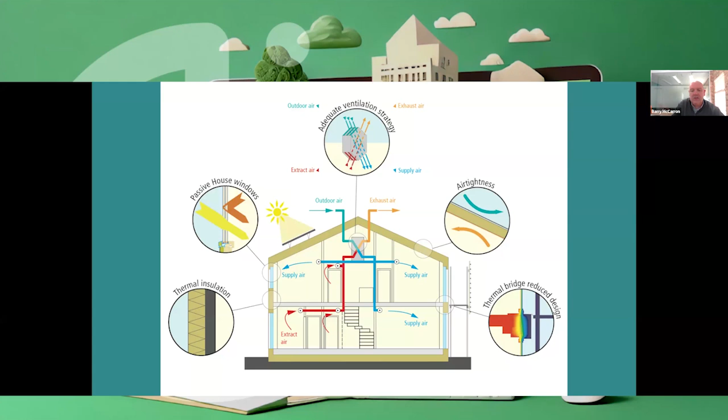Passive house for retrofit is no different than passive house for new build. As Jamie outlined, there are 5 key principles, all basically relating to floors, walls, and roof. First is having really good U values with high quality insulation, which drives down heating demand. Alongside that, it's critical to get the thermal bridging right. Then we look at windows, triple glazed, and air tightness, which goes hand in hand with the fifth principle: mechanical heat recovery ventilation. All 5 are well-proven methodology for getting genuine high performance.

When you couple them with renewable energy, you get excellent low carbon heating solutions. We've had a pipeline since we started offering retrofit, and the first project I'll profile today is a standard semi-detached house going back to the 1940s, in Glasnevin, Dublin. That's the first case study. We also have this one in development in Howth, also in Dublin.

I made a joke yesterday—I'm not sure what the lambda value or insulation level is on that ivy, but it's going to be an interesting project, with a brick finish underneath it. We're looking forward to the challenges that one will present. And then we've this gorgeous grand design, you could say, up in Donegal, which will be an exciting project for us in KORE Retrofit as well.

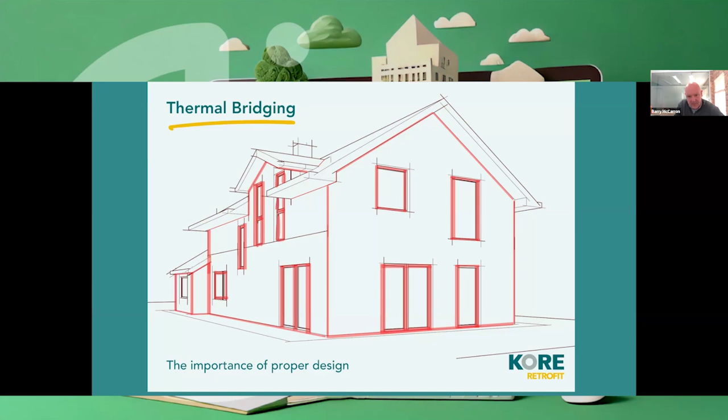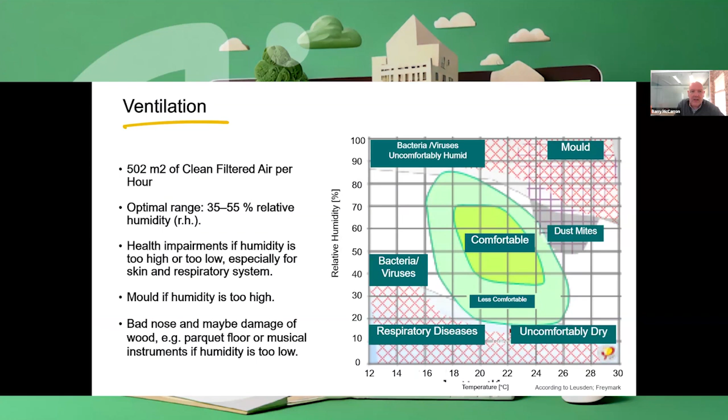All 3 of these are to the passive house retrofit standard. The big challenge I usually identify is that two of the principles hardest for people to adopt are thermal bridging, well depicted in this graphic showing all the red areas as thermal bridging, and not everybody is au fait with this—it hammers home the importance of good design. The other area that goes hand in hand with this is ventilation, which we'll take a deep dive into.

The Glasnevin project, as I said, is from the 1940s. It's currently sitting at a BER of 405 kilowatt hours, and we're proposing to get this to an A1, meeting the passive house standard in combination—going from a whopping 405 to 20 kilowatt hours. The treated floor area is roughly 201 meters squared, and the form factor of the building is not too bad. A bungalow would be quite bad, up at 3 or 4, and some of the other presenters will touch on that.

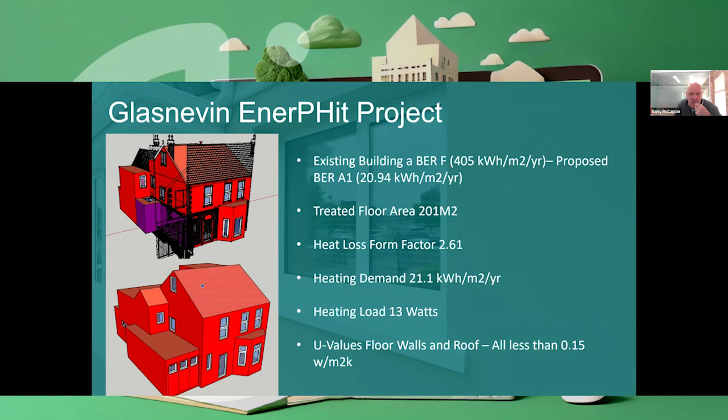The heating demand via the initial PHPP and designPH is 21.1, which comes under the passive house level of 25 kilowatt hours, and the heating load comes in at 13 watts per square meter—really good high performance. The U values on the project are all under 0.15. I'm caught for time so can't go into every wall type, but there's a variety of different arrangements in this project, which illustrates how passive house isn't that rigid—it does allow a certain degree of flexibility.

Building on the earlier slide about thermal bridging, I always like to quantify that and give a reference point. The thermal bridging in this house, illustrated there in the stick frame pulling out exactly what's there, totals 405 meters added up for this building in Glasnevin, and it's just a semi-detached house. A useful but comical reference point is that's higher than the Empire State Building—that really hammers home how significant the meterage is when it's all added up.

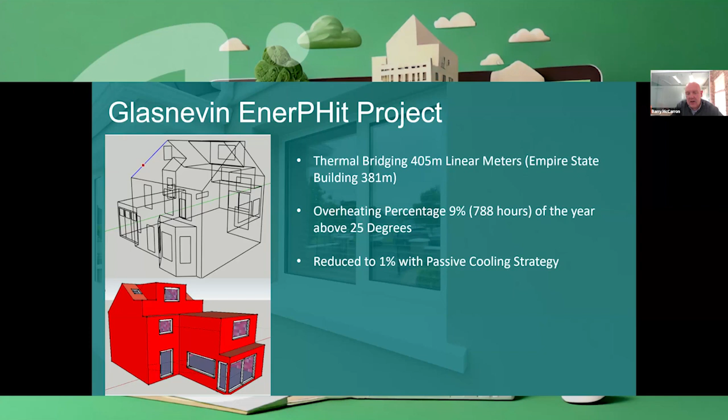The overheating, when initially modelled—because with retrofit projects you're usually constrained, you can't really use PHPP as a design tool since the building is in situ—came in at an overheating of 9%, without introducing any mechanical ventilation. With careful design and implementation of a passive cooling strategy, we were able to get that down to 1%.

So I'd expect a question on that afterwards. In terms of the running cost, this means down to 21 kilowatt hours, which is outlined there, that's going to extrapolate to about €500 a year, and the domestic hot water again coming in at an expected 585.

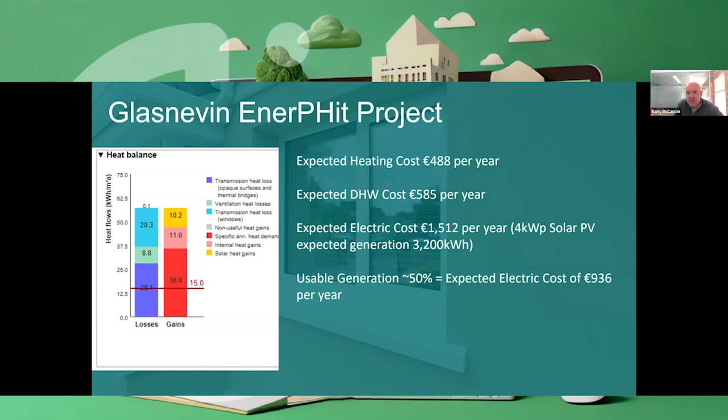So all in all, when you combine that with electric cost, based on a standard situation, and the PV being in play, you're talking an overall total energy cost of €2,500 a year. When you compare that to what the house was running at and being lived in, that works out at a saving altogether of circa €6,100 a year.

Again, what is taught in a lot of the passive house teaching is to do a full appraisal of that and extrapolate it over a mortgage. These homeowners have a 30-year mortgage, so you're talking a combined saving over that period amounting to a whopping 183,000 if it was the full thing, but 51,000 on the other hand is the running cost. So that's a good picture of the before and after.

And then by using retrofit as a stretch metric within this company and on as many retrofits as we can, we're really addressing this operational story. So not only in terms of energy and costs, but also for future metrics, carbon is a really good story as well with all of this. And of course, we're moving from NZEB, thankfully, into ZEB, so this goes hand in hand with the trajectory of the building industry in Ireland.

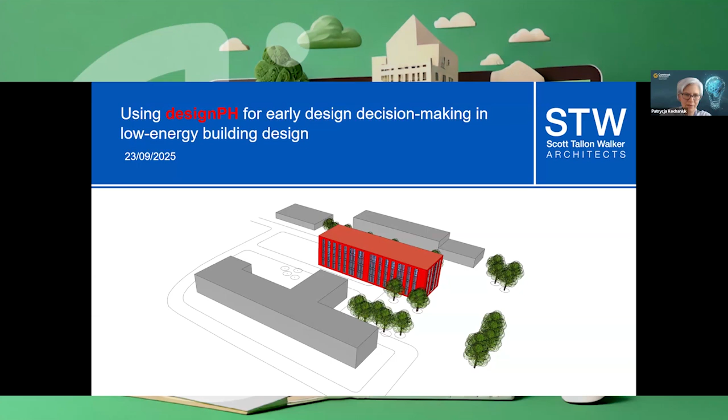So what is designPH? It's a plugin for SketchUp, so it lives within SketchUp software. It works as an extension. So we're using SketchUp for developing the model, and then through designPH's tools we apply the U values and so on, the thermal properties of the building. And it calculates the heating demand.

So it's all about the building physics within the design for low energy buildings or passive house buildings. So it's the first part of the design. From designPH, it needs to be exported to PHPP in order to apply the services and the heating systems to get the actual energy use. But this is the first step, and for the preliminary design, this is what we should be focusing on.

So the process starts with just importing the site to SketchUp. We can do it through geolocation, so we can import the Google map with the terrain and with the objects. For some areas, I think Dublin is pretty much developed, it can be just simply put in.

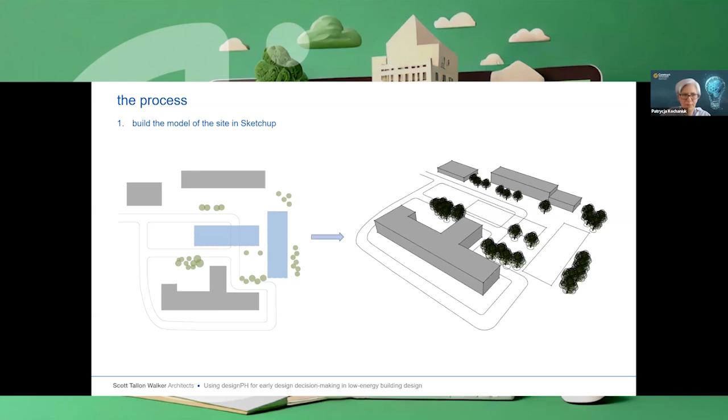Then we look at the building. For the model, we only model the external skin of the external envelope, so it's a single skin. We apply its properties through a right click of the mouse, and we pick the U value from the list. So it's very simple.

For the walls and floors, we apply the U values and thermal bridges. For the windows, it uses the components in SketchUp, so we can just apply the thicknesses of the frames and then the U values and G values of the glazing. It's quite detailed in what SketchUp can do. There's quite a lot of information in there, and it's quite reliable.

Apart from what we put into designPH, when we look at what I'm going to be looking at later, we also need to consider overheating, and for that we need to do the export to PHPP and apply the ventilation settings so we can see what the problem is with the overheating.

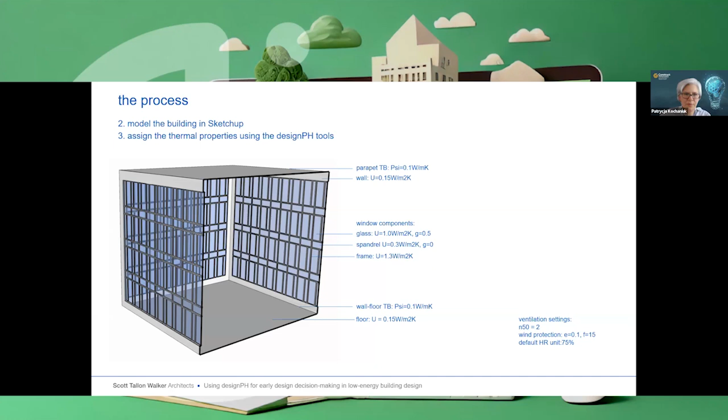So we locate the building within the site. In this case, it's a 4-story office building with a floor area of 2,800 square meters. The shape was already thought over, and we just put in the most efficient form factor possible.

This is how it looks after pressing the button to run the analysis, and we can see the same red buildings that Barry was showing. This is how it looks after it's analyzed, with the same graph on the left showing the balance of energy, the losses and the gains.

In the case of an office building with a lot of glazing, you can see the majority of losses are through the windows. I should have said, I've used double glazing for this building, so the aim would be to achieve the low energy building level. It's not a passive house level, but we can see how big of an impact the windows have.

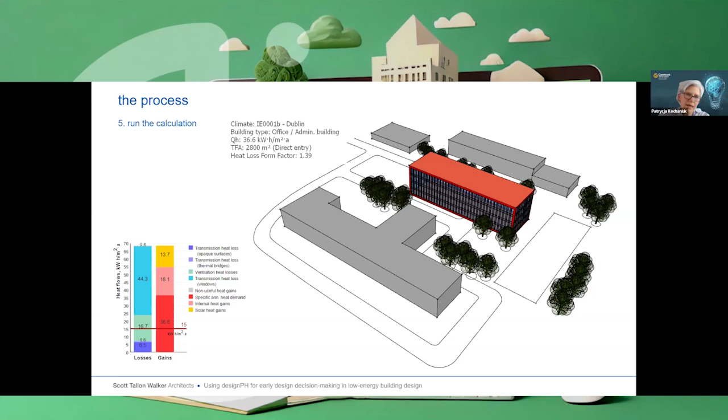Also worth mentioning is the internal heat gains, which is also very high in commercial buildings, and that's part of why overheating is an issue.

For this study, we were trying to achieve under 10% overheating targets. That's like the first step during the design, and then it can be optimized further with the design of natural ventilation or mechanical ventilation if need be. But for the building envelope first pass, the aim is to get under 10%.

So we had another pass, and here it's hitting the target with larger overshadowing devices outside. So that's the first option.

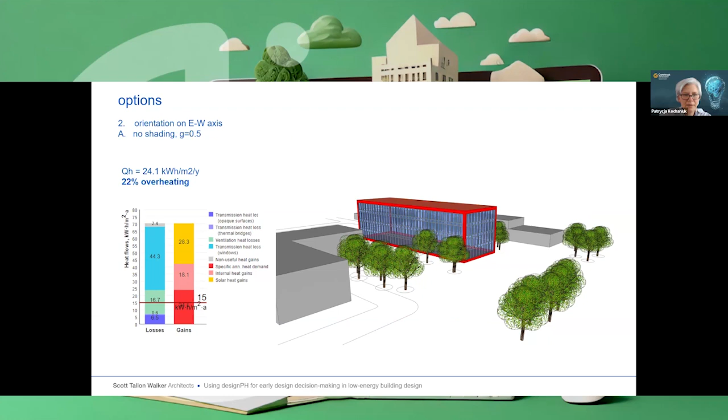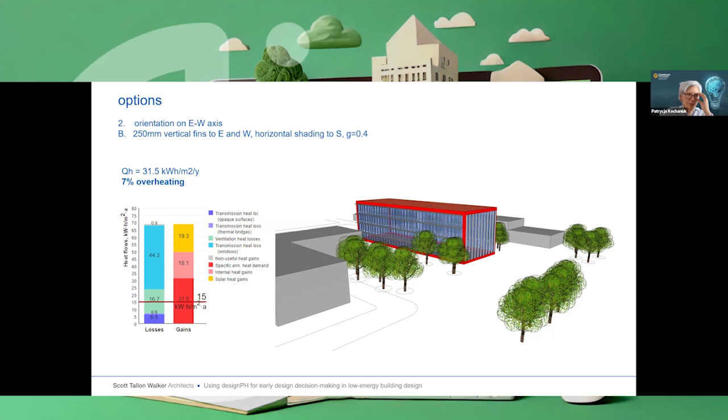The second one is we're looking at the other direction, so we now have long elevations facing south and north. Straight away the heating demand is slightly lower than our first option with the other orientation. With the reduced G value and a little bit of shading, we're achieving what we wanted for the overheating.

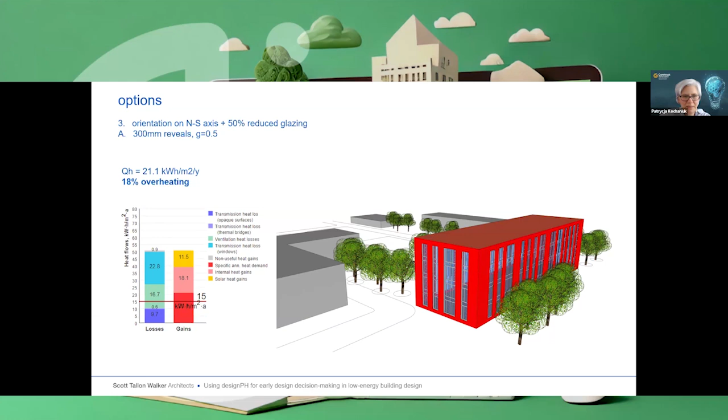So then we looked at another option which reduces the glazing. Going back to this orientation, the glazing is reduced by 50%, and straight away the overheating is lower, even for this baseline level, and then lower again with lower G value, and similar for this one.

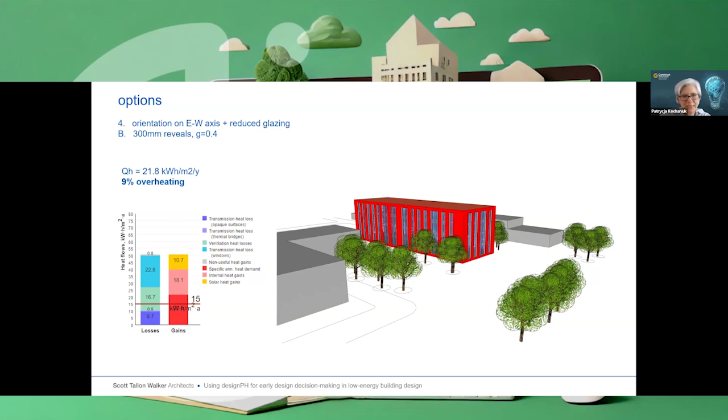Out of all four options, the east-west axis with a low amount of windows is the best option. It's not surprising, but I think it's valuable to see it and understand what impact it has at the very early stage of design, so we can know for sure that this is what it's going to be.

So these are the four options, and if we look at the line from left to right, you can see an 8% improvement for the fully glazed facades between the orientations, and similar for the facade that's 50% less glazing. But for the comparison going up and down, the amount of glazing makes a much bigger difference. Finally, the comparison between the first option and the last option is 36%.

So just by using exactly the same materials, basically the same building, just changing the orientation and the amount of glazing, it's making a lot of difference. So that's from me - this is what we do at a very early design stage.

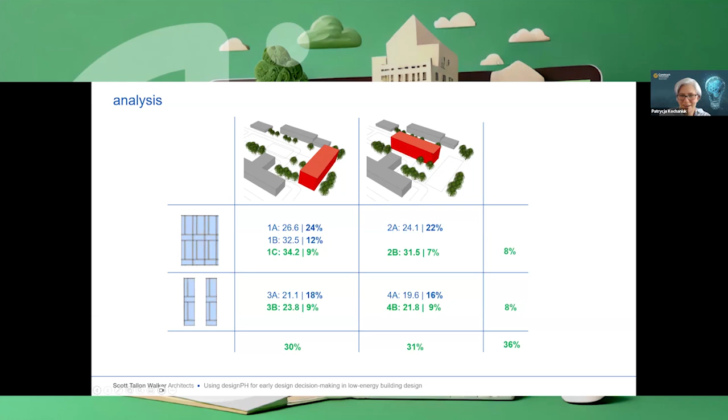Thanks, Jamie. Brilliant. Thanks, Patrycja. That's great to see. You looked at that investment early on in terms of decision making, having some quick models that you can put together and look at the impact of orientation, proportionate glazing, and shading on the overall heating demand and overheating in buildings.

Many people forget overheating is now as big a concern as reducing the amount of heating needed in a building, so trying to get that balance. It has always been a problem, dealt with by mechanical ventilation, but we need to pay more attention to this. So we're trying to have low energy buildings, reduce the amount of mechanical ventilation required, and therefore have less energy demand on our buildings - that's where good concept design comes in to achieve that.

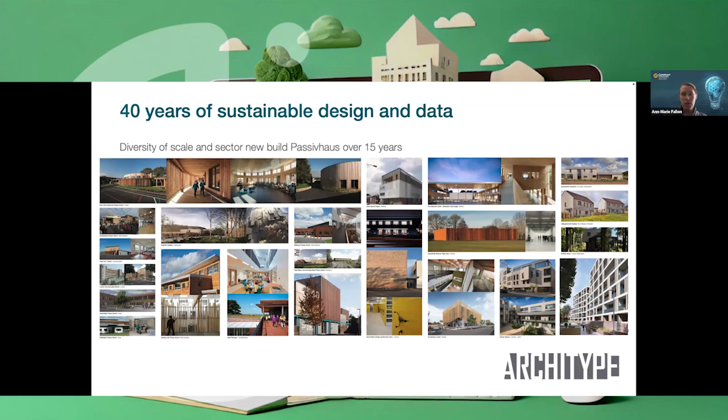So I'm Anne-Marie Fallon, an Associate Director with Architype, and also one of the new co-directors of the Passive House Trust in the UK, phasing into that job over the next couple of months. I'm here to talk about Architype's development of schools generally over the last couple of years across the UK, and in particular Scotland, with one more detailed case study to go through.

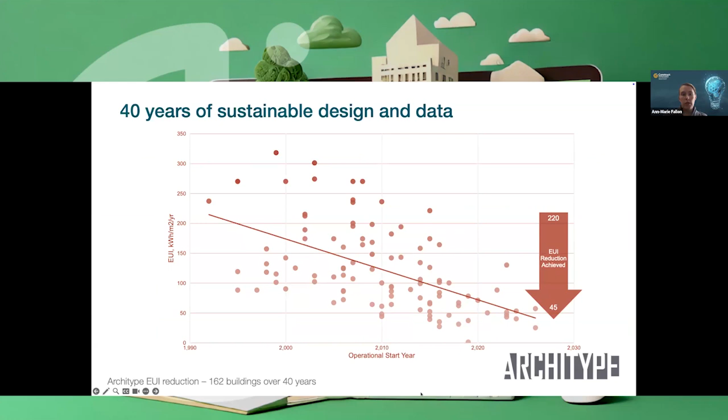Last year, Architype celebrated their 40th anniversary. They have their practice with 3 studios established across the UK. You can see that from the early 1990s, we've been gradually improving our energy use intensity outcomes for our projects - this is looking at the actual operational use of these buildings currently, and we're on a downwards trajectory. I'd really encourage people to look at their own practice and approach in the same way.

I'm just going to show a few slides of completed projects and some more recent projects. We mainly focus on passive house projects as a methodology in the practice because of the quality assurance that comes with it - partially for the climate emergency, but also because clients, especially post-Grenfell, are really looking to amplify quality assurance in their procurement processes.

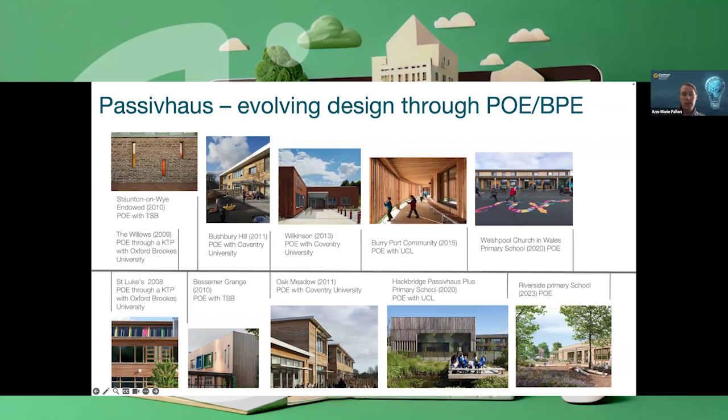So we've done a lot of post-occupancy evaluation on our own projects. There's a list of our primary schools where we've learned early lessons, like the overglazing and localized overheating that tends to happen in projects, learning those lessons and bringing them forward over the last decade or so. And we're able to evidence that some of the standards out there, like the net zero carbon building standard that various industry members have set in the UK - the Enterprise Centre at the University of East Anglia has been performing at the level targeted for 2050, 35 years ahead of that target. Ever since it was completed in 2015, it's achieving that energy use intensity that's been set.

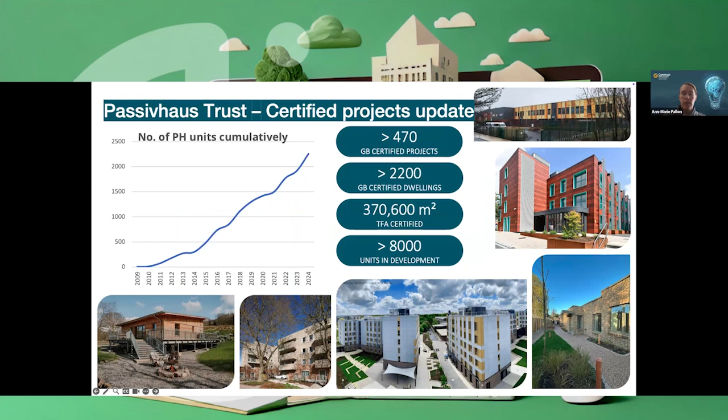Just with my Passive House Trust hat on, a bit of an overview at the end of 2024 of where Passive House certification was in the UK in relation to units, number of metres squared of area, etc. There's an ever increasing amount of buildings being delivered at scale.

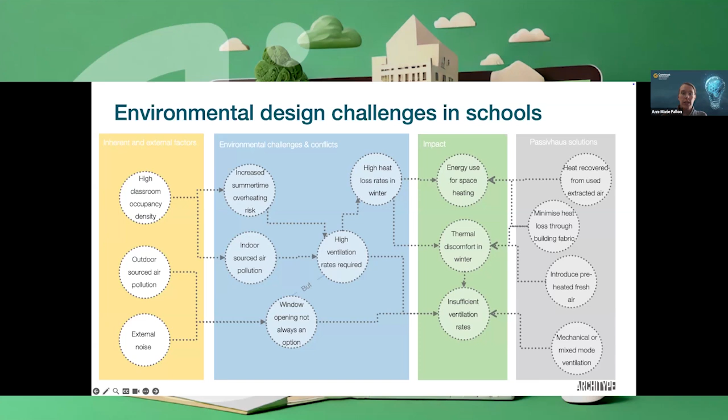Back to schools and the specialism I'm talking to you about today. We know there's a lot of environmental design challenges in schools, and I understand there's actually no Passive House schools in Ireland - would love to know more about that if anybody has information. We're dealing with a number of parameters, and we can solve all these things technically with mechanical intervention, but that usually increases our energy costs and can compromise our comfort.

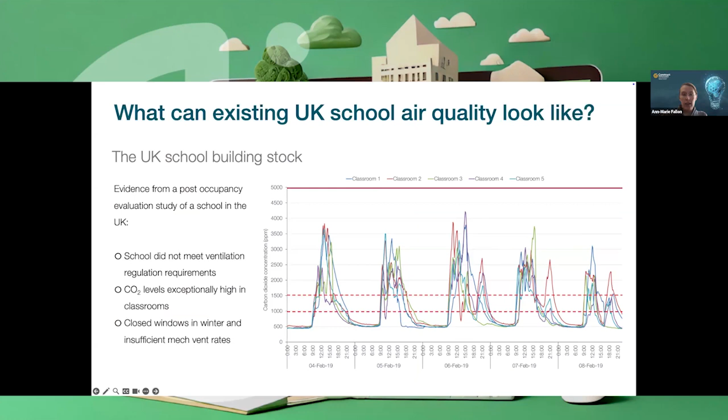This is a school we did post-occupancy of, not one of ours, but another school completed in 2017, lauded as one of the most energy efficient new low carbon buildings in this particular local authority. We can see the indoor air quality for various classrooms in this particular week in February are very, very high, windows are closed, they're not being opened, and various different issues. By contrast, Passive House is getting us down to very healthy low CO2 limits and providing really good indoor air quality in our buildings.

We've just done some more research with UCL in London, looking at quantifying how hazardous normal classrooms are in the business as usual case of education spaces, compared to bio-based Passive House projects. Using low VOC natural materials internally and coupling that with the indoor air quality parameters of Passive House, and being very mindful around how we look at compound risk - not just the proxies of different VOCs, but going into detail, because we have some compounds present in education spaces that are 100,000 times more hazardous than other spaces or other compounds. We'll have more coming out on that in due course.

Riverside Primary School is the first Passive House certified primary school in Scotland, and there's several in the rest of the UK across England and Wales, but this was the first one in Scotland. A 2-stream, 500 pupil school with nursery and special needs provision and around 70 full-time staff. This project was delivered and designed through COVID, so we had all of that economic situation to work with, and was completed in June 2023.

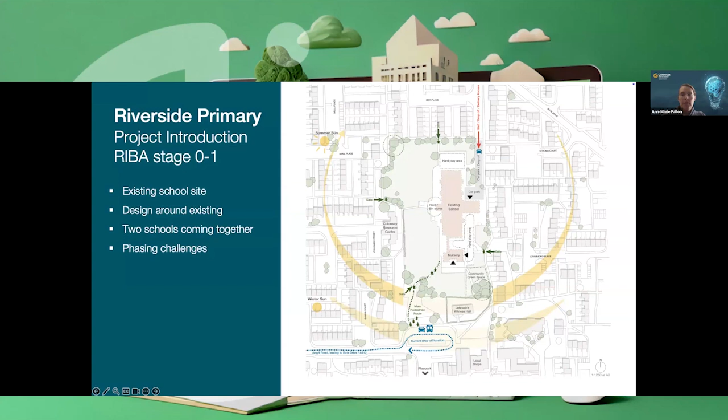It was a tandem build site - you can see here the existing school. It was a 1970s single story school, there were some RAAC issues within the structural integrity of the school, so it was nominated for demolition. We were able to utilize the optimized gain on the site, but also refocus a sense of place within this local community in Perth, just north of Edinburgh, where we were able to reorientate the site.

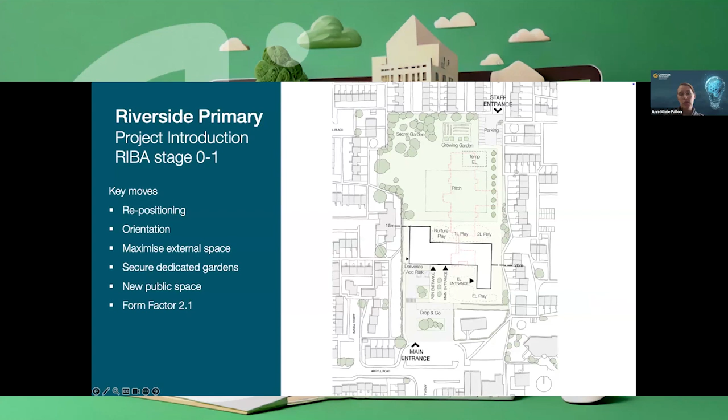We had to decant the nursery, but the existing school was allowed to continue on the site as well. It was a consolidation effort between two schools that came together, so a lot of community work, a lot of involvement around pedagogy and other things that I won't be able to touch on today. The GIFA is around 4,300 meters squared.

It was delivered for a modest budget at the time of 20 million, given the Ukraine volatility and the other economic events happening around that time. It was the first steel frame Passive House project that we delivered, and one of the first steel frame Passive House projects actually certified in the UK.

How this all came about was that we had an enabler from Scottish Government - the Scottish Futures Trust, the infrastructure arm of Scottish Government, essentially provided funding based on targeted energy metrics. Some of this was around indoor air quality. We had to comply with in-use energy targets to achieve 100% of that funding, and it's outcomes based, meaning over 25 years the local authority draws down that funding. So it's not a case of have your cake and eat it up front - you have to prove the building is performing and staying in good condition, and one of those metrics is our energy use intensity metric.

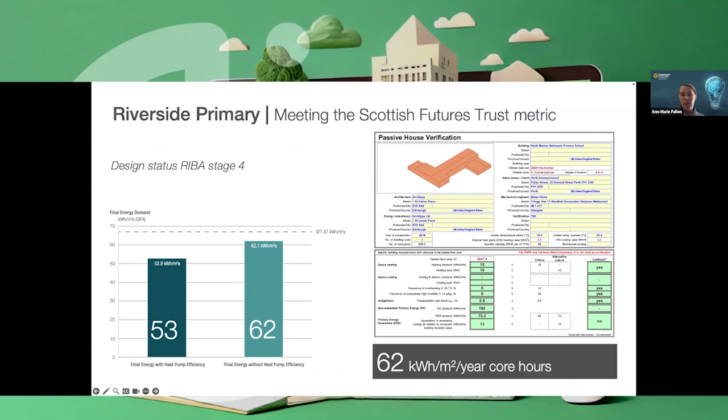So there was a great learning experience for us, but there's also a lot of optimization the client did subsequently. The project began as a CLT project, so much more simple flat substrates, easier to achieve air tightness and fabric and thermal continuity, but it evolved into steel frame because of the local supply chain constraints and the need to save about 850,000 on the overall price to bring it in to where it was required to be.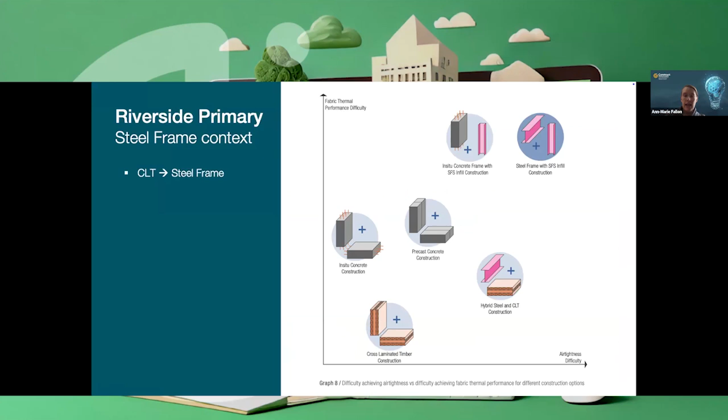And this actually evolved into national guidance, a technical position paper. We're hoping to release another update to this next year, very applicable, with lots of really good information in there that would support passive house certification in Ireland and just general good quality and workmanship in construction. So really encourage you to download and read that document.

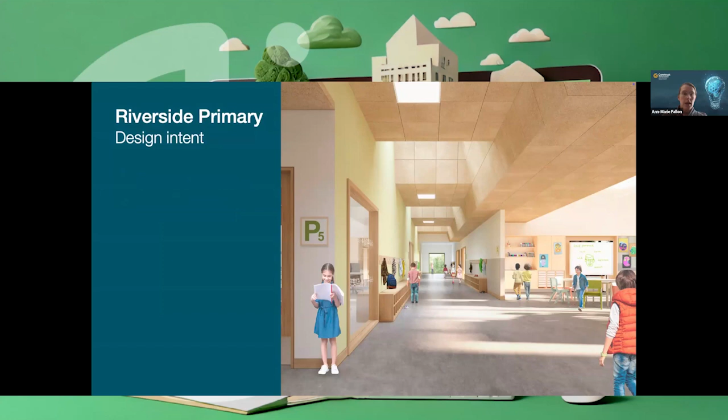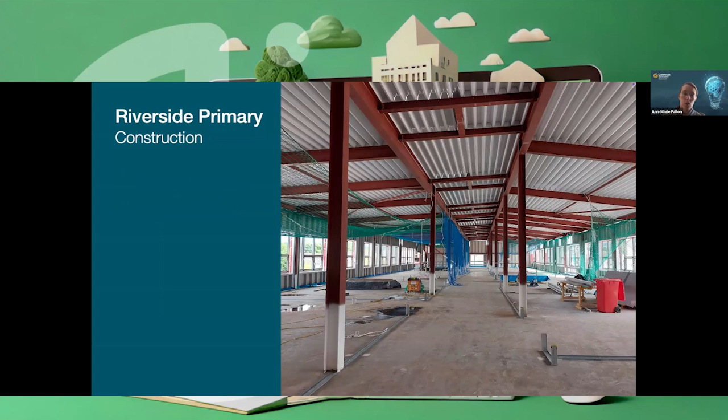So again, did that really affect the VE process, our design intent? We really hoped not, but it did present a lot of other challenges for technical detailing and ensuring that we met the U values and all the other risk factors as best we could. And we don't feel that the overall internal experience for the students has been affected too much by that process.

So here's some photos just of the project going up on site. Air tightness membrane was Proctor Wraptite, wrapped on a cement board, outside the steel frame. And then outside of that, there was 180 mil of Knauf rock - a Knauf product that had a kind of wind tightness facing on the outside of the material to help with the wind washing and to reduce the wind washing where we could. And there was some insulation then within the SFS infill.

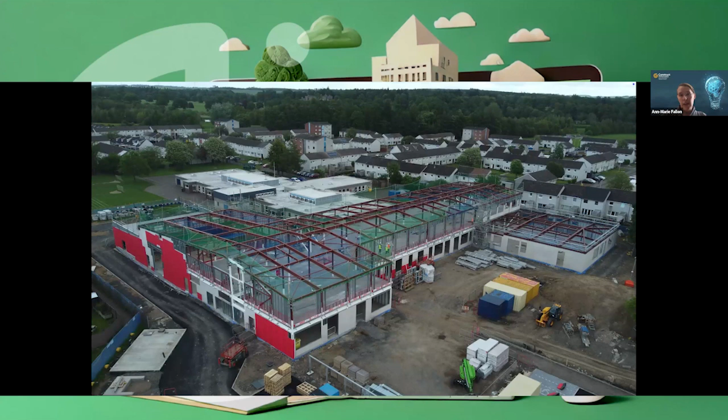So even though the form factor was quite favourable at 2.1, we were up in Perth, a slightly different climate, and we were building a secondary school at the same time, and we were able to get away with U values of 0.2 watts per meter squared Kelvin on that secondary school because of its very favourable form factor. But on the smaller school, a little bit further north, the average U value for the walls was between 0.13 and 0.14, so a little lower than the larger project.

A little bit on the MEP. This project was developed through COVID, so the M&E for the ventilation approach had about 30% extra redundancy built into it because the client was quite nervous about the next viral pandemic that might happen. This required the project to be updated and beams and ducts etc. to be upgraded to meet that demand.

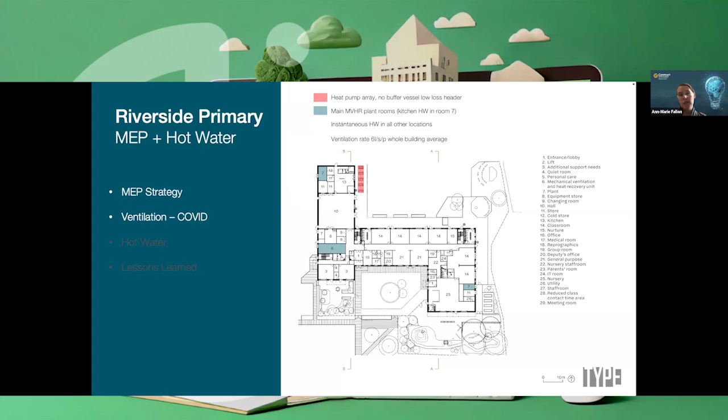But as a result, even though the overall ventilation system itself is designed for 12 litres per second per person on average in that boosted facility to prevent the next kind of viral pandemic - even though you'd probably keep your children at home if that happened, or you'd half the class sizes so you'd get more volume of air for those people in the classrooms - the average building ventilation rate is 6 litres per person per second, and we're still getting really exemplar indoor air quality.

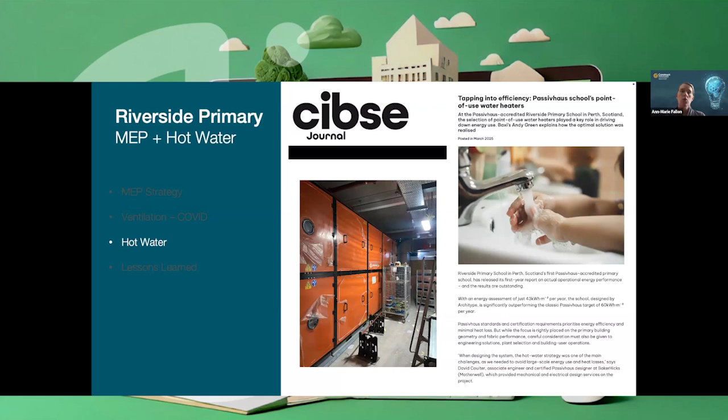The hot water was also really optimized. Again, a really useful CIBSE Journal that BakerHicks developed, where we were able to save about 700 litres of storage of hot water across the scheme by going with instantaneous electric.

And there was a lot of reflections with Perth and Kinross Council, the client, around how they experienced the project - controls, BMS, and how all those different plants and systems engage with each other. It's really important to have that tied down.

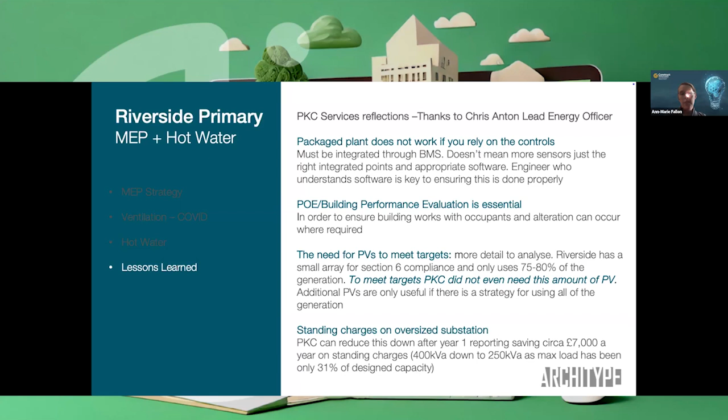PVs were quite an interesting one - you know, if you can't send that PV energy somewhere where it's difficult to manage or get advantage from as the kind of client or owner of the site. I'll come back to the oversized substation in a second. How did they reduce energy consumption even further in year 2?

I found this probably the most compelling of all the findings we have of this project, where they actually reduced the heating time per day because the fabric of the building is so good in terms of performance that they were able to drop the time clock by 3 hours, so 9 to 2pm. The school's open from about 7:30 to 5 because there's a nursery running all day as well. The MVHRs, the ventilation, don't actually turn on till about 10am, and that's to do with how the school operates, with very much an open door policy.

All classroom doors are open. Students come in during that 10 or 15 minute period in the morning, and they've monitored it. They have sensors all over the building, and they find that the indoor air quality is not affected by delaying the start of the MVHRs in the morning. And of course, the MVHRs then turn off overnight as well, so again, all very energy saving.

Flow temperatures were reduced as well. This local authority are really on top of how they control their estate and how they optimize their building performance, so they've just been saving carbon left, right and centre purely through building optimization, even on a passive house project, which is really great to see.

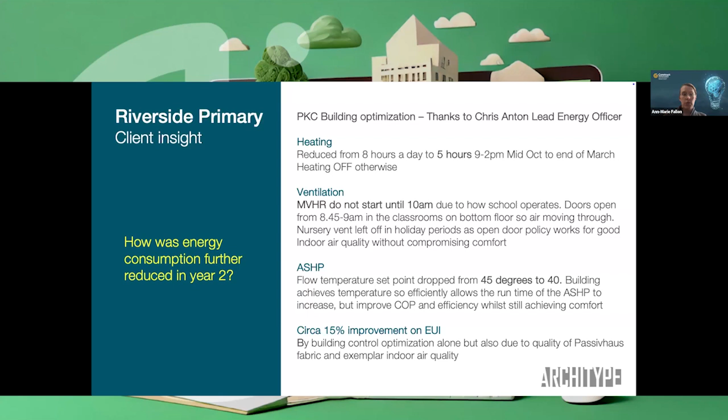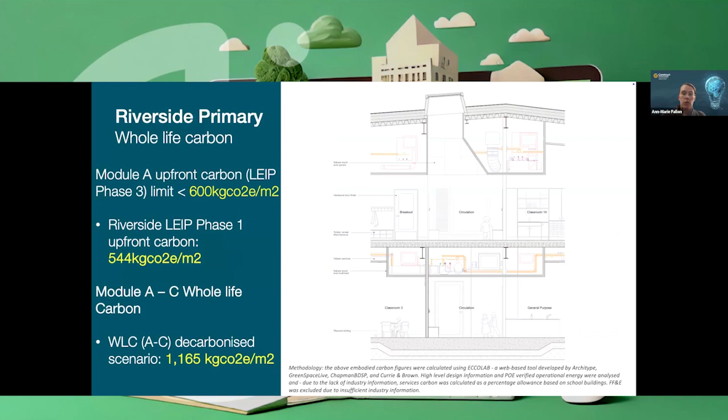Just to mention briefly where our upfront and whole life carbon targets are sitting at the moment. The Scottish Futures Trust have, since this project has been developed, brought out an embodied carbon target, an upfront carbon target, and we're sitting, even with steel frame, at 544 kilograms of CO2 for that. Then approximately, with our operational energy included, the whole life decarbonised scenario is around 1,165. Remember, that's reporting the operational energy as well as the actual embodied life cycle energy at the same time.

Very briefly on how does a project like this get actually delivered. We all talk about collaboration, but this is really genuine, actual collaboration - having your passive house champion on the phone or on FaceTime talking to you about issues on site, being on site quite regularly, giving the right support to the site team, making sure that we're really involved and we're not stepping away from that process.

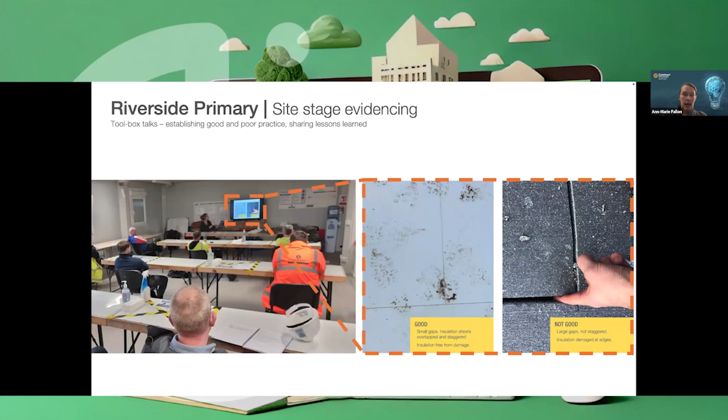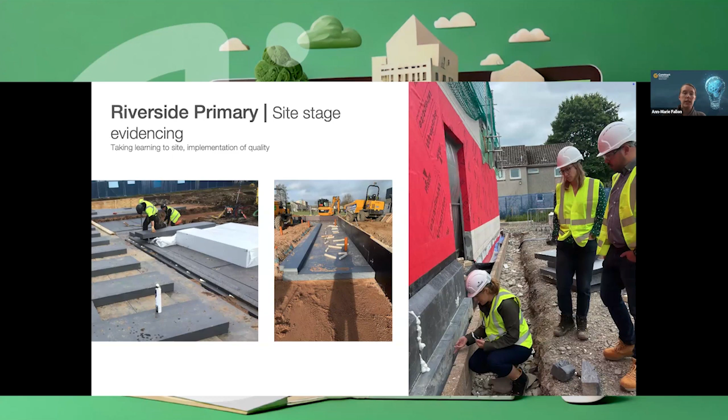That also involved giving toolbox talks all the way through the process. You can see COVID having an impact there, kind of a bit of nostalgia in the site cabins. In this case there wasn't a model example hut built on the site - we actually picked a corner of the site alongside the contractor to sign off on samples as we went through, making sure quality was benchmarked and acceptable, and new trades were brought in and trained up on what to expect.

Passive house evidencing - I see a lot of concern with cost around passive house and quality assurance and how we evidence it, and really it doesn't cost that much at all to just take basic records of the products coming to site and locating them and ensuring that they are installed properly once everyone is on board with what we're trying to work towards.

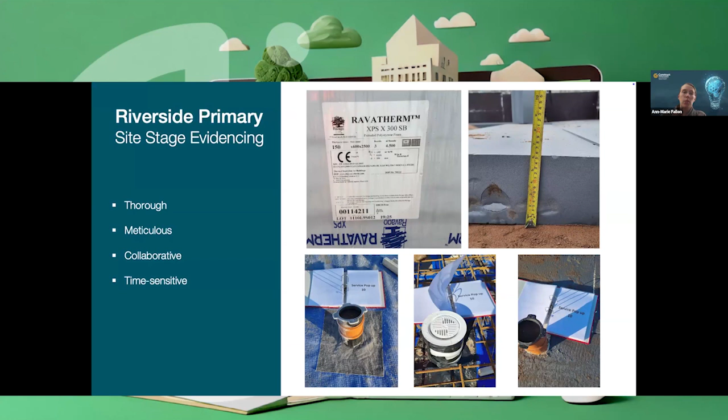This project, the contingency stayed very under budget, so there wasn't like a 20% creep on cost on this project - it was run very tightly. Another compelling thing for me is that it's the first school in this local authority in 25 years that hasn't had a leaking roof, such is the quality of what we do tend to deliver in the construction industry at the moment.

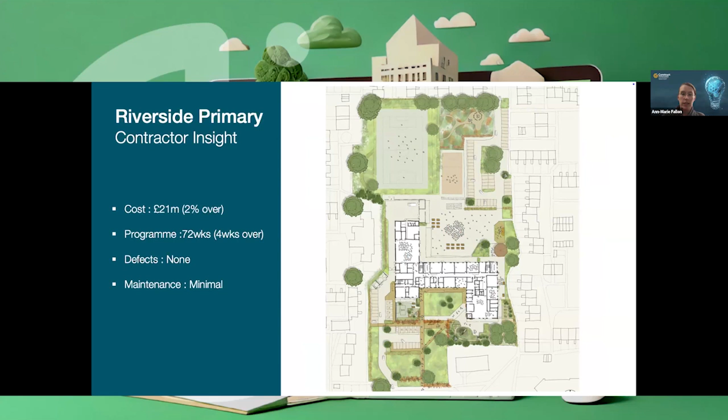And that is apparent across several local authorities that I've spoken to, when they actually talk about defects - they are getting defects a huge amount in their capital projects. A little bit on POE and then I'll wrap up.

The post-occupancy evaluation, or the building performance evaluation as we try to call it now, is also wrapped into the outcomes-based funding for this project, so you can't get your funding unless you deliver 12 to 18 months of building performance evaluation of the scheme once it's completed. That was a qualitative survey and workshops with the staff and pupils, with some really positive feedback there, bearing in mind the condition of the two schools that the communities came from were really at the end of their life. This school has really brought people together.

And when we get into the quantitative side, looking at the energy monitoring across the whole building, looking at how low the hot water and heating demand is - the kitchen, it's a catering kitchen, so it's doing about 600 meals a day, hot meals - and just seeing the server, and again the BMS, interestingly, does take up quite an amount of that energy.

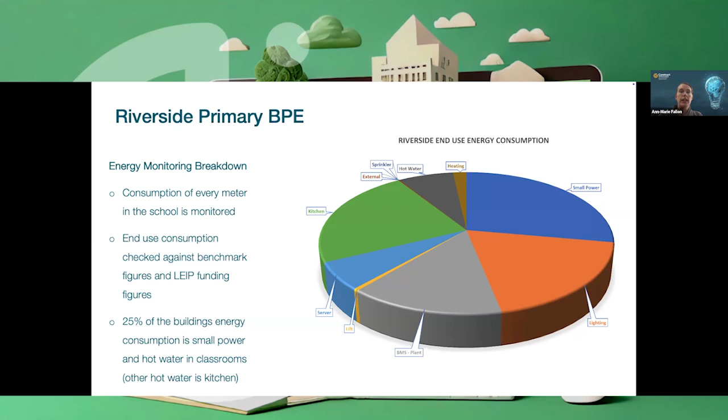And lighting, we actually had to go in and recommission the lighting in the building because it had been over-commissioned to be too bright, which I think is what typically happens in the summertime when you're trying to hand over buildings anyway. But that in itself saved 60% of the energy for the lighting. So making sure your lighting's commissioned appropriately is really important.

Coming back to the substation, this is a challenge in Ireland, especially around Dublin and some of the bigger cities where we don't have the grid capacity. We've a load of data centres taking all the energy, and we're trying to build our housing over here, and there's no energy to build the housing or to run it. This substation for this school is only using 30% of its capacity, which was agreed at construction - the incoming load from the grid was 400 kVA.

At the start of the design process, we had a lot of inexperience, a lot of nervousness within the design team, and the M&E engineers really wanted to stick with a very high kVA incoming substation. We can see that if we had stuck with that and didn't persuade them to reduce it at construction stage, the client would have been paying even more in standing charges every year.

So by recording how little incoming energy load the school was actually using - bearing in mind there's electric vehicle charging, electric hot water, heat pumps, a lot of electricity used in the building, no gas - the maximum incoming load used in year one was 125 kVA, roughly only a third of the capacity of the substation. So the client's been able to go back in year two and reduce the incoming load in the substation, saving about 7,000 per annum on operational costs on the standing charge side of things. But of course, as an architect, I would have loved to have value-engineered that substation and saved a couple hundred thousand there, maybe rather than VEing to a steel frame. So it's maybe how we look at these things at the start that's really critical.

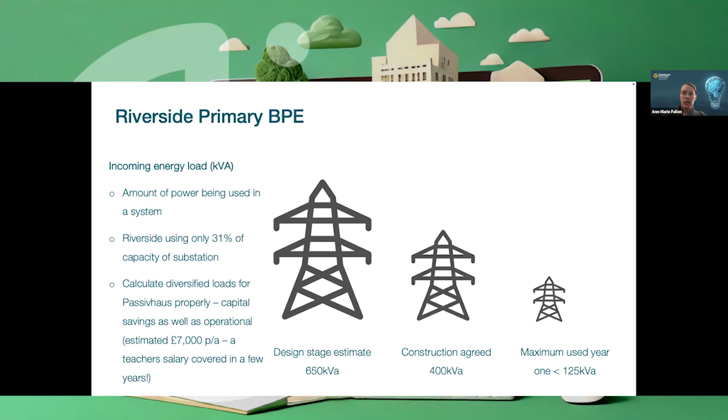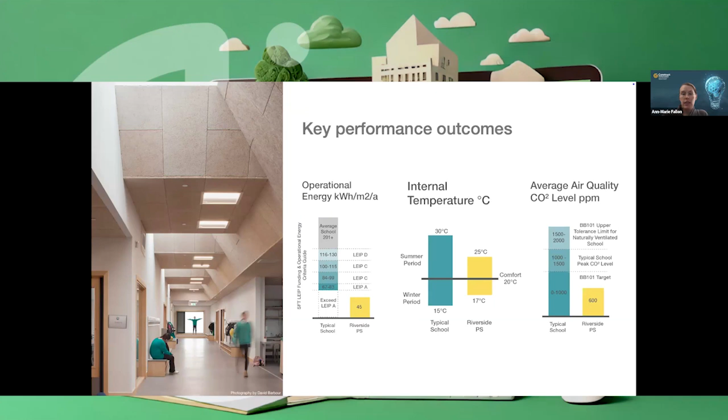And then again, what's very typical in passive house projects: very low operational energy, very good thermally comfortable spaces, and really exemplar indoor air quality, far exceeding the ventilation regulations for schools in the UK. And we've just touched on overheating earlier.

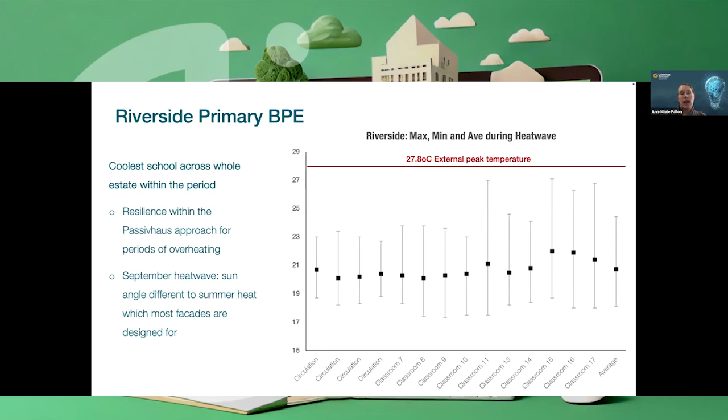We actually had a heat wave in Scotland, believe it or not, in September 2024 - we did earlier this summer as well. The average temperature in this school through that period was the coolest, most comfortable school out of all the schools in the area, which was a kind of surprise to hear. We had an external peak temperature of almost 28 degrees, so not quite London overheating temperatures, but we can see the internal temperature tracked on a median basis fairly comfortably under the 22, 23 degree area.

Some brief insight: we were the architect and the passive house designer. Having an early design team appointment and then the contractor coming on board quite early as well was really powerful for this project - really true collaboration, understanding the sequencing. And finally, yes, steel frame is more challenging but not impossible.

And the wider benefits of the project are around how it's become a kind of catalyst in the community. We had the First Minister of Scotland, John Swinney, open the school formally last year. The school has had a much wider impact than just being passive house certified - we've informed various guidance and industry, it's won some awards, and we're really happy to continue sharing lessons learned on the project as well.